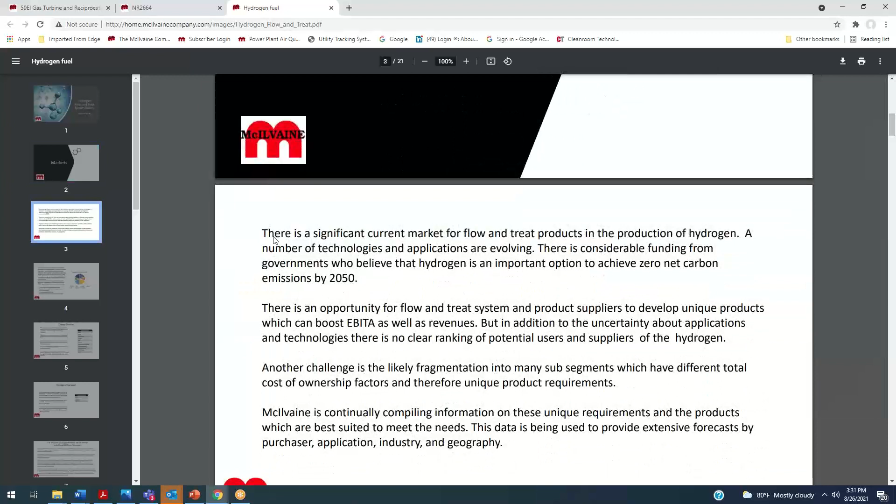The market for hydrogen is a very interesting and rapidly developing market in that we have all sorts of different technologies, applications, and needs and interests for using hydrogen as a fuel.

So the opportunity is certainly somewhat uncertain because of all the different variables, but the McIlvaine company is following this on a daily basis and publishing weekly alerts, the utility e-alert, with the latest information on the use of hydrogen for the power industry. So the sales of flow and treat products to produce hydrogen in 2050 could range from 15 billion to 50 billion. So it's going to be a considerable market.

The market, to some extent, will be shaped by the suppliers. Other methods of energy storage, for instance, will compete. To the extent that the flow and treat industry can improve the economics of hydrogen, the larger the market share for this fuel option will be.

Individual flow and treat suppliers will need to determine their specific potential revenues and EBITDA depending on several variables, including the total amount of hydrogen consumed, percent used in different industrial sectors, sources of power, geographical distribution, and the technologies used to make the hydrogen.

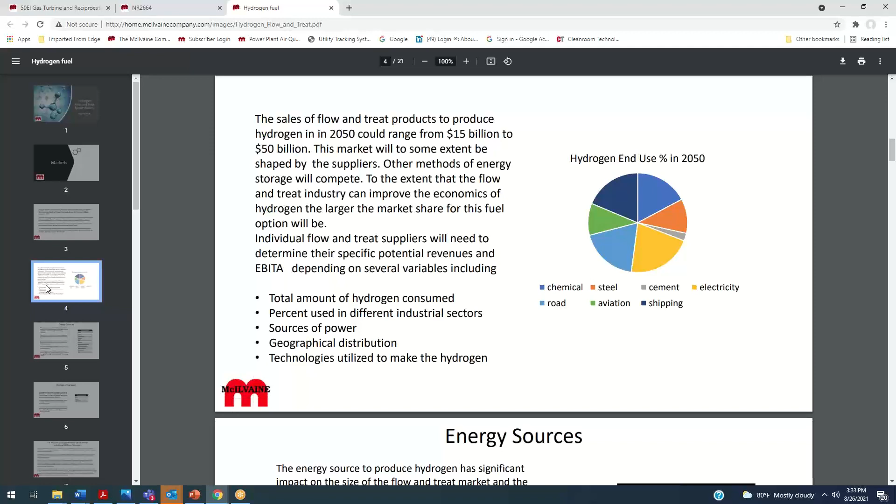And the end use in 2050, as you can see here, electricity would be only one of a number of uses for it, including cement, steel, chemical industry, obviously transportation, on the road, aviation, and shipping, all are potential markets.

So the energy source to produce the hydrogen has significant impact on the size of the flow and treat market and the competitive position of specific flow and treat companies.

Some suppliers, such as Andritz, with strengths in hydropower, are going to benefit from the potential of using hydropower, which in many cases is not strategically located to provide electricity directly, and hydrogen may be a more convenient way of utilizing that energy source. And wind and solar, of course, is a big potential driver for the electrolyzers and that aspect of it.

Bioenergy is a very interesting opportunity because you not only can produce the hydrogen, but using a biofuel, you're actually taking the CO2 out of the air, so it becomes a carbon negative approach.

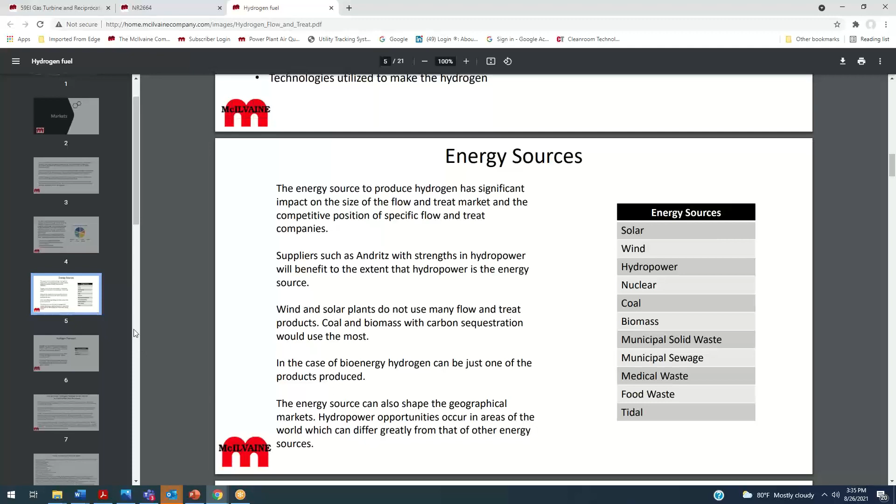And municipal sewage is an interesting potential, a very big potential. Municipal solid waste could be 1 billion tons of CO2 removed that way. Food waste, and of course, nuclear, coal, and wind and solar we've already discussed here.

So hydrogen can be transported as a gas, a liquid, or as ammonia. The choice of ammonia as a method for transport has a number of advantages and is being pursued as a blue hydrogen approach. Ammonia can be produced in Australia with CCS to eliminate the CO2 emissions and then shipped around the world.

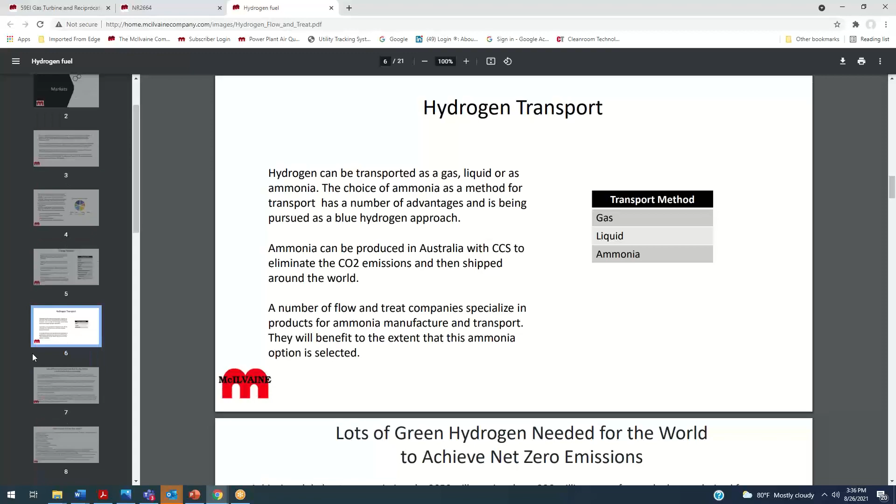So a number of flow and treat companies specialize in products for ammonia manufacture and transport, and they will benefit to the extent that this ammonia option is selected.

The achievement of net zero will require 306 million tons of green hydrogen derived from renewable energy each year, according to IEA. So the IEA sets out the steps needed to get the world to net zero emissions by mid-century and says that 197 million tons of blue hydrogen would be required annually, derived from natural gas or coal with carbon capture and storage.

We have another analysis, which you can also view and hear, where we believe that BECCS will be a much bigger part of this mix, and that you'll be able to generate hydrogen from that.

The electrolytic hydrogen is going to be huge, but the problem is going to be getting enough electrolyzer capacity, and you've got the catalytic membranes and other components that need to be ramped up to provide as much as 3,500 gigawatts of electrolyzers. This is a huge increase from about 300 megawatts of electrolyzers available today. So electrolyzers are a key aspect of all this as well.

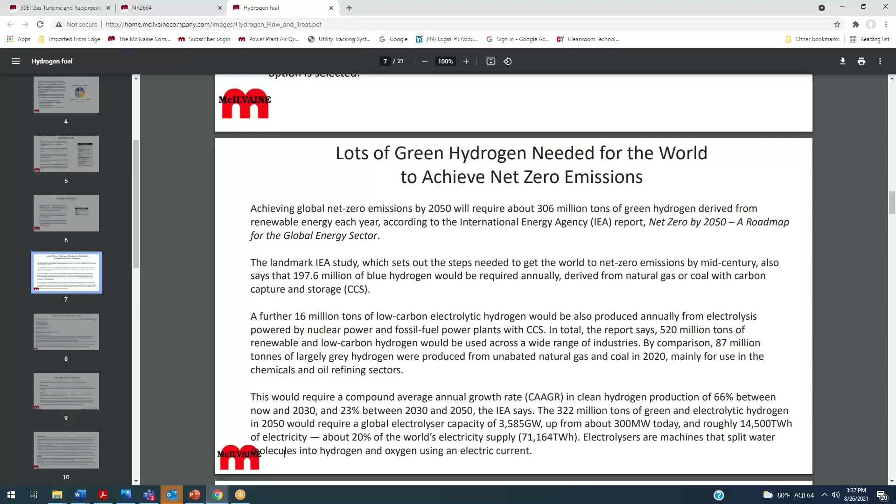So it's interesting to see the IEA breakout, which views all the ways we will need to introduce various different fuel and electricity sources in order to reduce greenhouse gases to net zero per year. And the problem is that there are going to be some uses that are going to be emitting CO2, and they have to be offset with some carbon negative applications.

So bioenergy is part of the mix as IEA sees it, with 640 gigawatts of bioenergy being required to meet net zero for the world.

We have another analysis that shows this could be 2,000 gigawatts, and some of these other approaches would be reduced. One thing to keep in mind here is the capacity factor. A coal-fired power plant converted for bioenergy would have a 60 or 70% capacity, whereas solar might only have a 25% or 10% capacity factor.

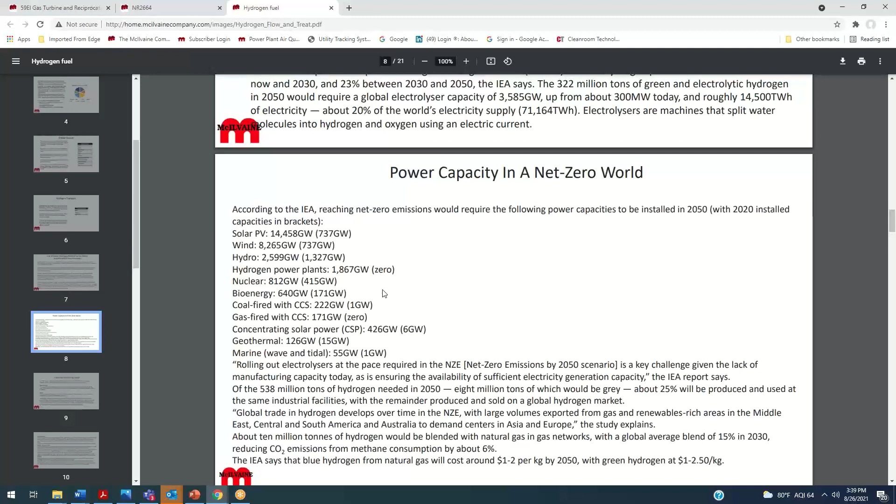So coal-fired capacity with CCS is estimated by IEA at a couple hundred gigawatts. These are some of the numbers that they have put out here. And again, hydrogen would play a major role, as you see here.

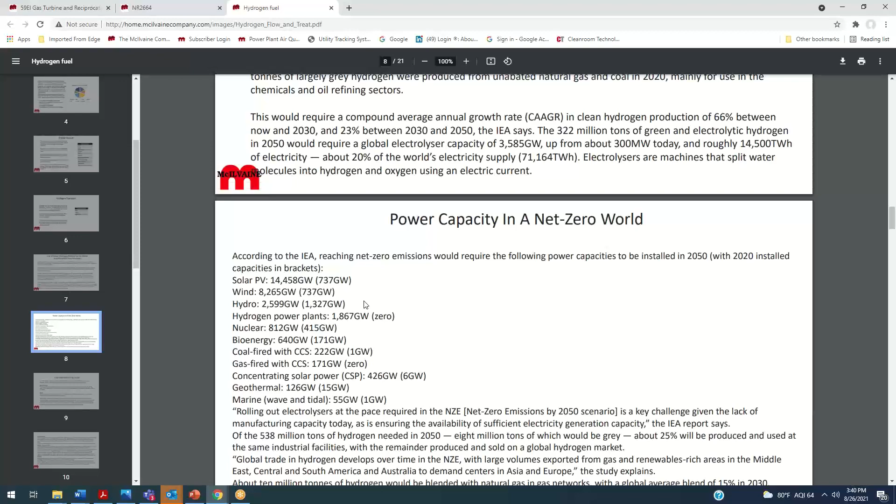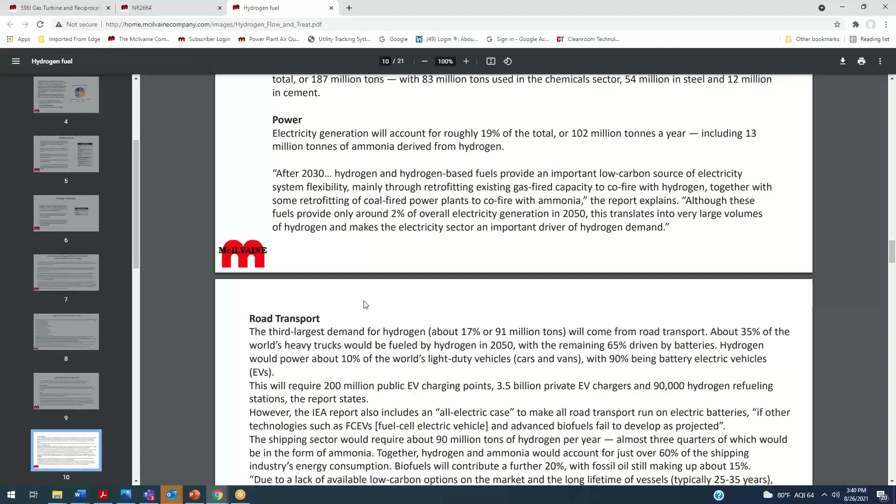1,867 gigawatts of hydrogen being produced. It would have a number of different uses: heavy industry, of course, power. Road transport is the third largest demand for hydrogen, and then you've got aviation and shipping.

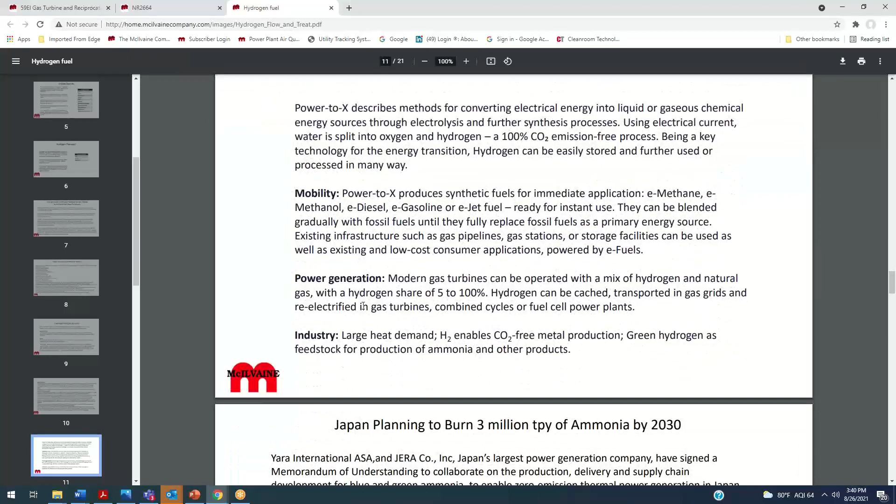So this is a big program. Japan is stepping up to it, and because of their more remote location, they're looking at the import of lots of ammonia—3 million tons of ammonia a year just by 2030, in one contract that they are pursuing.

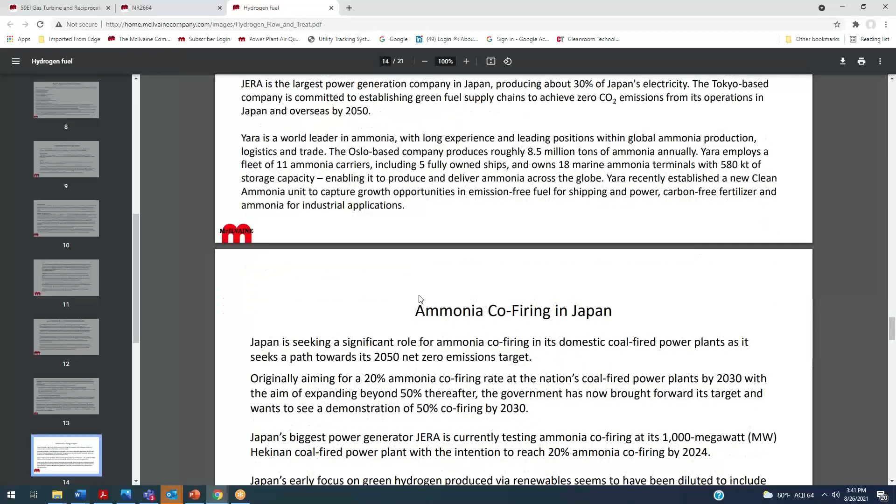A part of that's going to come from Yara, and as we discussed before, with Australia as a source of the ammonia. Yara is the world leader in ammonia, with long experience and leading positions in global ammonia production. So one of the options is ammonia co-firing in Japan.

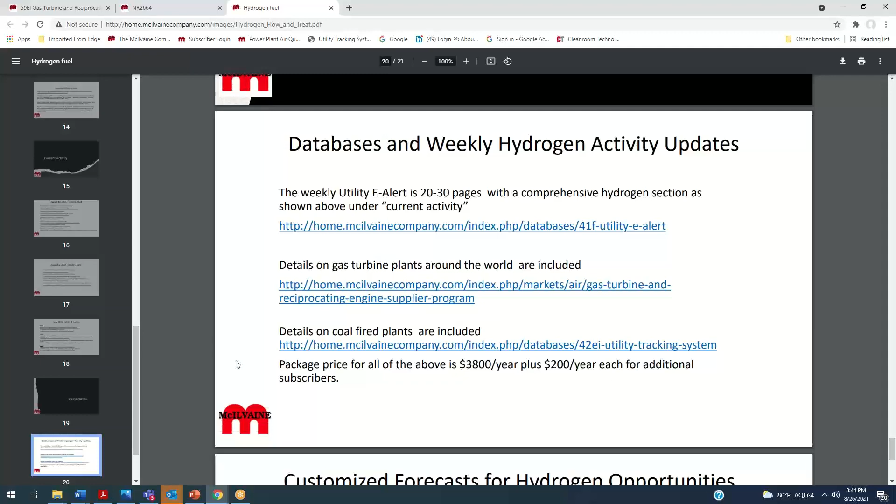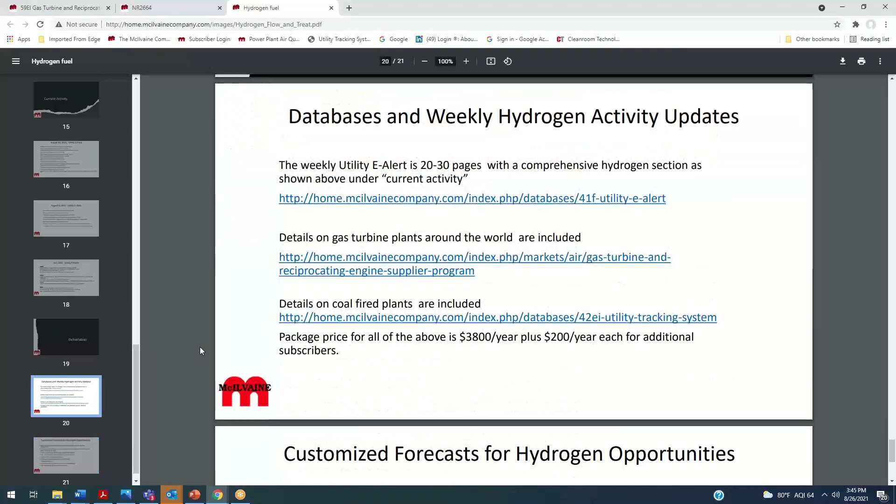We're continuing to do the utility alert on a weekly basis, and we have details on all the coal-fired and gas turbine plants around the world. We're also reporting on nuclear and, of course, all the biomass and hydrogen activities. The tracking system is available along with the gas turbine system as well, and this is all available for a package price of $3,800 a year for all of this.